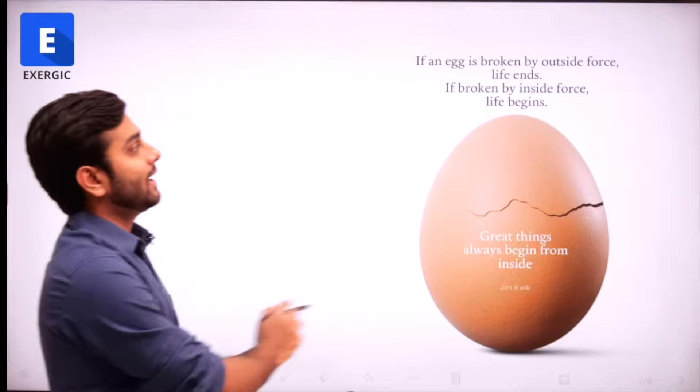Hello dear students, let us start this course by a very beautiful and very meaningful quote which is written here. If an egg is broken by the outside force, the life ends. But if it is broken by the inside force, the life begins. Great things always begin from inside.

What does it mean? It means that any egg, if it breaks from the outside, what happens? The life inside of that egg, it dies, right? It's the end of a life. But if it is breaking from the inside, means whatever living being is within that egg, that is opening up the shell, that is breaking the egg. It is the beginning of a life, right? So great things always begin from the inside.

Always look for inner inspirations and not external motivations. Always look for discipline which comes from within, right? This is something that you must realize, and it's a very important learning for you, not only as a GATE aspirant or any exams aspirant, but throughout in your life.

Now, why are we discussing this here in strength of materials? Let us focus on the first part of this. If an egg is broken by the outside force, the life ends, right? Any outside force, any outside load which is unwanted, in most of the times on any given body, on any component, has a negative effect, right? It tries to break it, crack it, bend it, distort it, deform it, right?

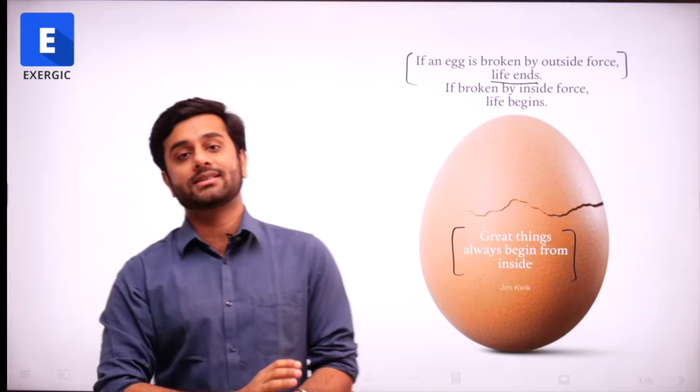Coming to the components that we design, that humans design, and especially we design them to be in use for long and long years. We want them to be of such a quality that they don't get bent, distort, deform due to any external load, any external force that is being applied to them, right? That is what we are going to study in strength of materials.

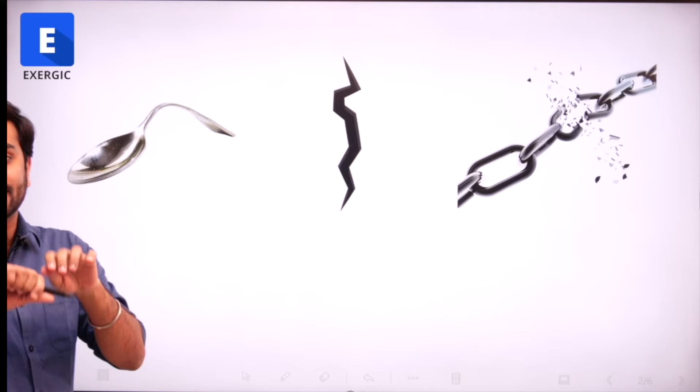There are a variety of things that can go wrong with any component that we have. Any component under use, under the action of external force, external load, either it can get bent, right? I have shown you a bent spoon, a very small example I am giving you right now. Or there can be cracks in that particular component, particular material, which can propagate, which can increase and finally break that particular component, right or not?

As an engineer, it's your responsibility, it is our responsibility to ensure a design using those materials, those designs, those components that do not bend, crack or fracture or break under the action of external loads, external forces, right? And that is what strength of materials is going to do. It's a very important subject and very interesting subject, has a variety of practical applications.

Whatever component we have, does not matter whether in mechanical engineering or electrical engineering or electronics or computer science engineering, whatever component you have, it is very much necessary to ensure that it does not break, right? Physically it does not break, bend, distort, right? Otherwise it will be of no use. Whether it's any electronics component, as I told you, or any mechanical component, right?

Right from a very small needle, right? Or a very small iron nail, to very large ships and buildings and bridges. Everything that we design, from that small size to those large dimensions, large sizes, everything we want to be in the right shape, right size, without any distortion, bending and any kind of fracture and breakage, right?

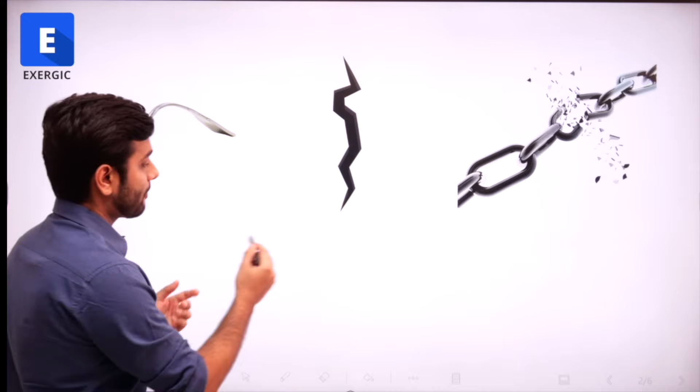One small thread, a very thin thread, and another thread we have which is thicker, okay? And what we are going to do now is apply a force on these threads, right? We are going to try to extend it. If one of them breaks, tell me which one is it going to be? If I am applying the same force on two threads, one is thinner, the other is thicker, of the same material, and one of them is going to break, tell me which one will break first?

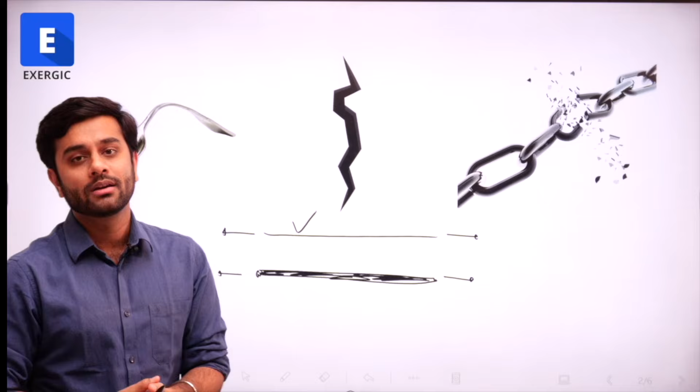This is going to break first, right? Very clear. It's the thin one. If I start asking you the concepts, why? You might not be able to conceptually answer it correctly at this point of time. But intuitively you can feel that this is the one which will break first. Similarly, I will give you one more example at this point of time.

Now suppose I have this scale, this ruler, right? If I try to bend it like this, and if I try to bend it like this, tell me which one of them will bend easier? Even without having a scale, you can answer based upon intuitive feelings. This is a scale. If I try to bend it like this, or if I try to bend it like this, what do you think? Which one of them will be easier to bend? Very easily you can answer this if you intuitively feel what is going on, right?

Very easy to bend it like this. But if you try to bend it like this, it's not easy. Even without having a scale in your hand, if you just close your eyes and imagine a scale or any such flat surface, you will realize that it's easy to bend it like this, but it's not easy to bend it like this, right? This is an experiment, right? The conclusion of this experiment you can very easily predict without even knowing the concept.

If I asked you the same thing for a different system, for some electrical system, and I asked you the conclusion of that experiment, you might not be able to answer it without knowing the concept, right? At this point of time, we have not discussed why it is able to easily bend like this, but it's not able to bend like this. Material is same, right? The applied moment, applied load is also same. But how is it happening? What concepts are governing this? We have not discussed yet. But still we are in a state to predict the conclusion of this experiment.

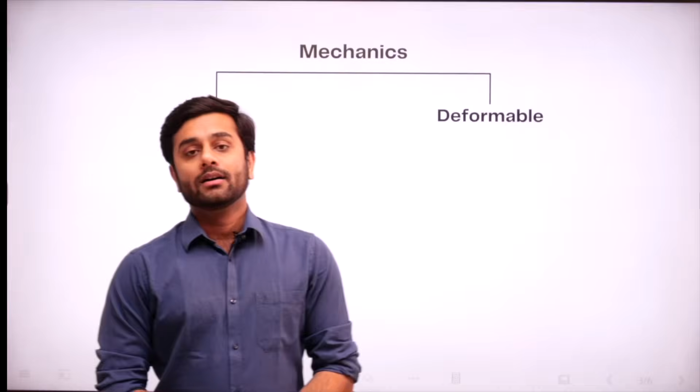Now, mechanics is a general name, a general branch of study which is divided across many classifications, right? The very first and basic classification of mechanics is between rigid and deformable bodies. Whether the body that we are analyzing is a rigid body or a deformable body, on the basis of that, the first classification is done.

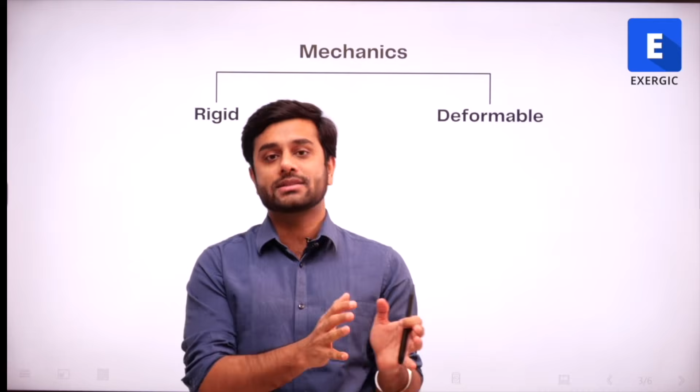And then it branches into engineering mechanics, something that we have covered already, right? Strength of materials or mechanics of materials is also a mechanics, right? Fluid mechanics, and even theory of machines and vibrations to a great extent. So that classification is what we are going to study now.

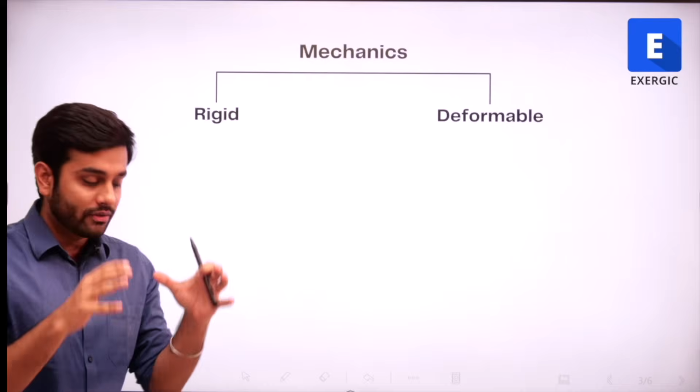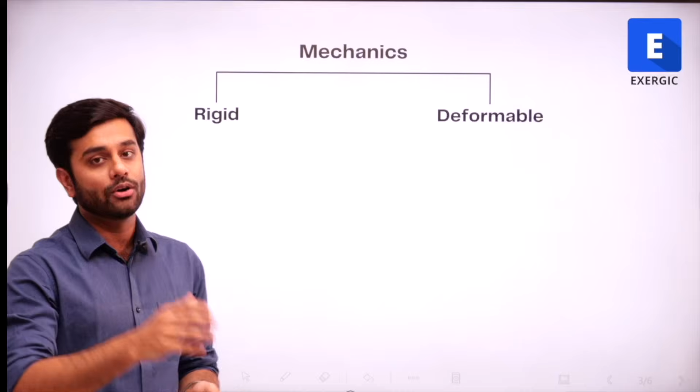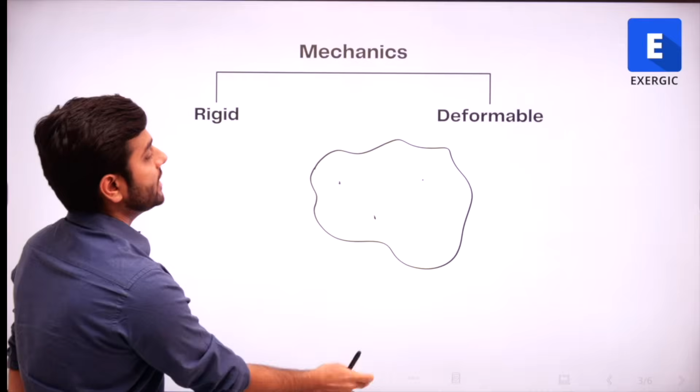So the first classification, as I told you, is based upon whether the body that we are considering is a rigid body or a deformable body. Let us first understand what exactly is meant by a rigid body or a deformable body. Suppose you have a general body shape I have shown here, right? It's a general solid body. On this body, any 2 points you take, it can be this one, or this one, or this one, any 2 points. So I have taken point A and point B.

Now this body is acted upon by different external forces or loads, okay? Under the action of that, in any general case, it is very much possible that the shape of this body is going to change, or the size of this body is going to change, right? I'm sure you know the difference between shape and size. It's very important. It's a basic English term, but you must know and realize the difference between shape and size.

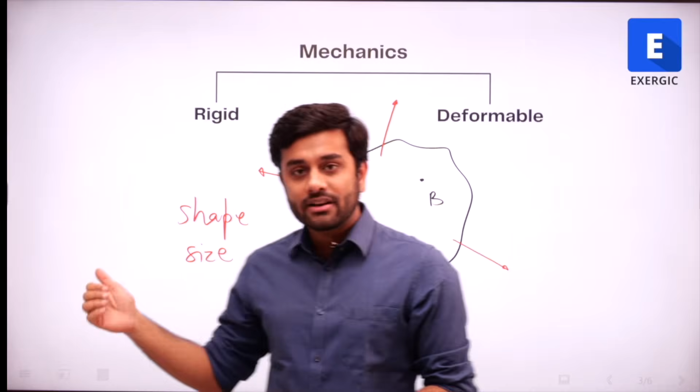Shape is something which tells you how the body looks from the external point of view. What I mean to say is, if the body looks cuboidal in shape, spherical in shape, triangular in shape, right? These all are the shapes of the body. It defines the orientation or the exterior look of the body. That is called a shape. Size refers to how large or how big the body is, right?

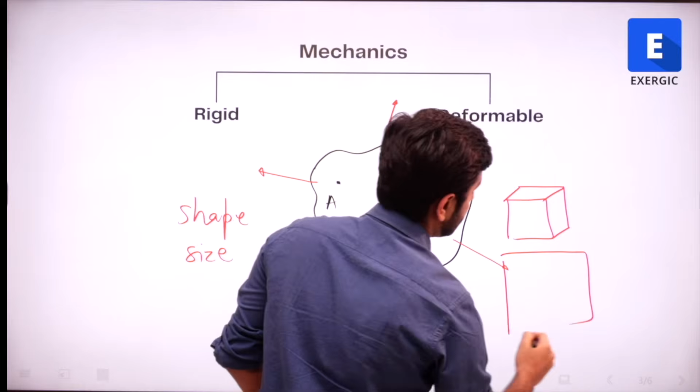So if I tell you through an example, this is a cube which is smaller in size, but the shape is a cube. If I draw another cube, this is also a cube. Both of them are having the same shape, but their sizes are not same. It is smaller in size, it is larger in size. It's a basic difference. I know strength of materials is not to tell these basic things, but I assume some of you might be having confusion about them. So I cleared it here because it will be discussed further in strength of materials.

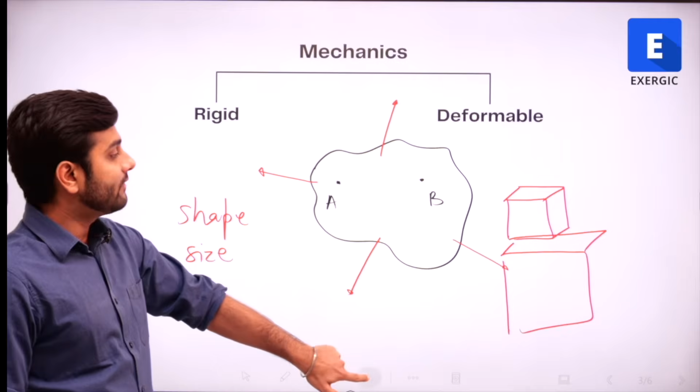So coming to the point, we are having a body here, as you can see, and this body is acted upon by different external loads or forces. Now it is very much possible that under the action of these forces acting on the body, the distance between point A and B will change. It can increase, it can decrease, right? A lot of things can happen.

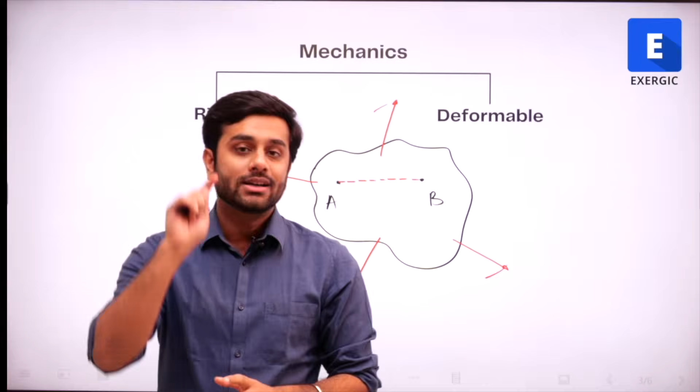A hypothetical body in which the distance between the points A and B does not change, no matter how many forces you apply, how heavy or how large loads you apply, such a body is called a rigid body. In a rigid body, the distance between any two randomly picked points will not change, irrespective of the external loads or forces applied on that body. Obviously, this is a hypothetical body.

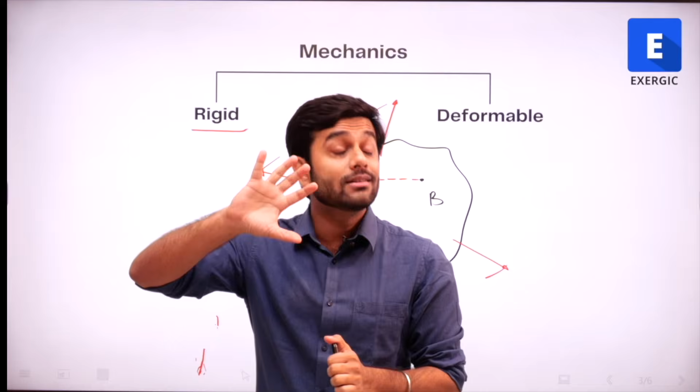No body in the world is a perfectly rigid body, because we know that the larger the force you apply, the result will be visible, right? It may not be visible to the naked eye, but the distance between the 2 points will start to change, will start to increase or decrease, right? But a rigid body is a hypothetical body, which means it is not real. No body in the entire world is actually rigid. All the other bodies that are available are deformable bodies.

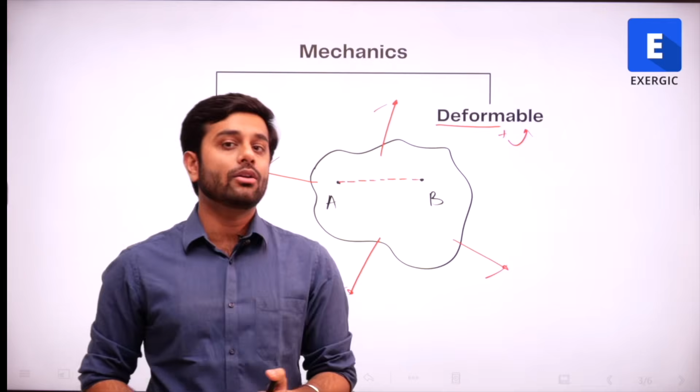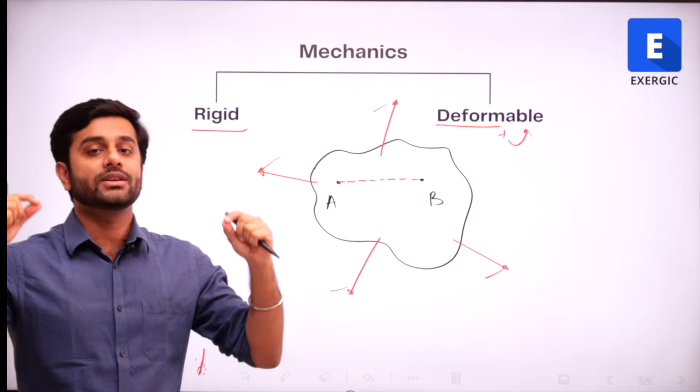What is meant by deformable body? The name itself tells you. Deform plus able, a body which is able to get deformed, which can change its shape, its size, right? Such a body is called a deformable body. In more technical or conceptual words, any two random points you pick on the body, under the action of applied loads, the distance between those 2 points will change. Such a body is called a deformable body. All real bodies are deformable.

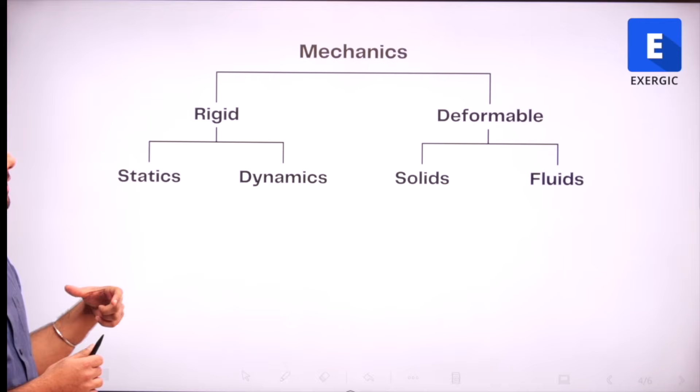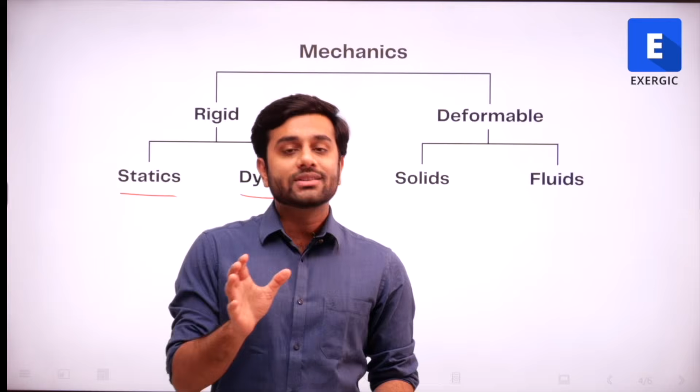So after understanding the first classification on the basis of whether the body is rigid or deformable, let us see further classification. As you can see, rigid bodies are further divided into two different branches of study. First is statics, other is dynamics. Let me brief you about this, although you already have an idea because you have covered engineering mechanics. In engineering mechanics, we don't consider the deformation of the body. We don't consider that under the action of applied force, the shape or the size of the body will change.

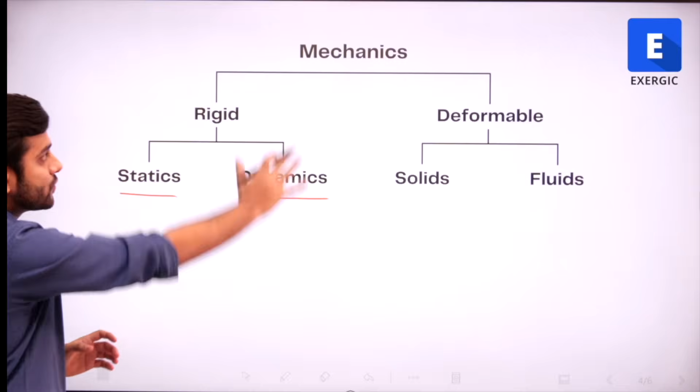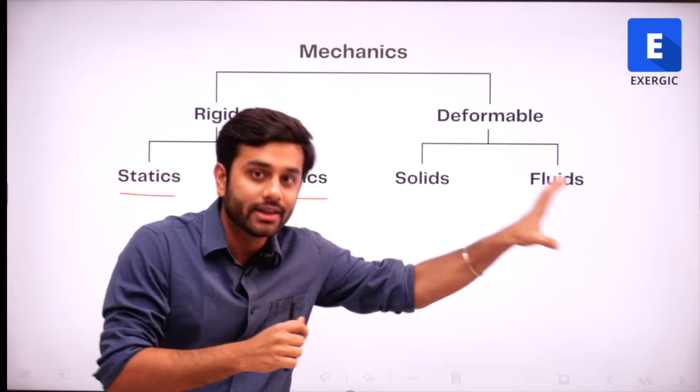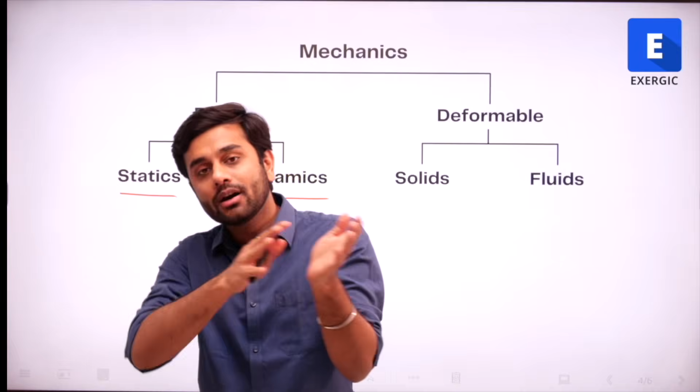Rather, we study the effect of the force by considering the motion of the body, whether the body is at rest or has started to move. That is the criteria on which we discuss engineering mechanics. In engineering mechanics, we never consider the deformation, twisting, bending, or distortion of the body. That branch of study is called rigid body mechanics. Even if the body is deformable and those deformations might be happening, that is not the point of discussion in engineering mechanics. We are only concerned about the motion part of the force.

This is further divided into statics and dynamics, which we have already covered in engineering mechanics. Then dynamics is further divided into kinematics and kinetics, which we have also already covered.

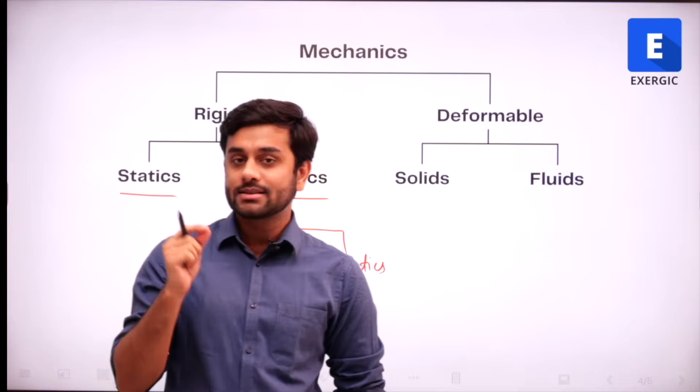At this point, I would also like to mention another subject here, which is theory of machines. This is another design subject which we are going to cover. In theory of machines also, the parts are considered to be rigid, and the deformation of the parts is not discussed. So theory of machines also comes under rigid body mechanics.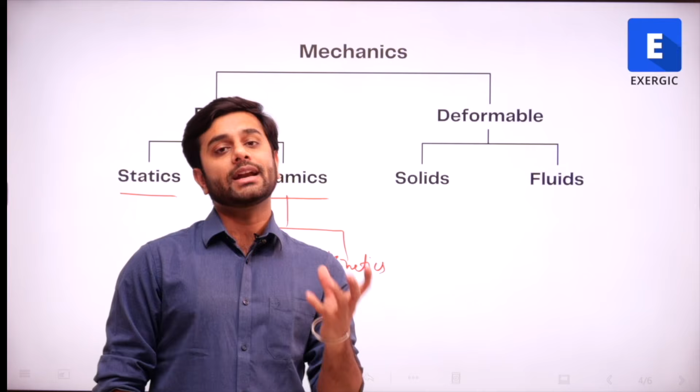You will find in some sources that theory of machines is said to be a part of rigid body dynamics, but that is not totally correct, because in theory of machines statics conditions also exist. When we cover theory of machines, you will realize that gear trains and some other cases involve static rigid body discussion. That is why theory of machines comes under rigid body mechanics, where both statics and dynamics are discussed. As you can see, mechanics has been divided into different branches which we deal with as different subjects, so you can see how interconnected they are.

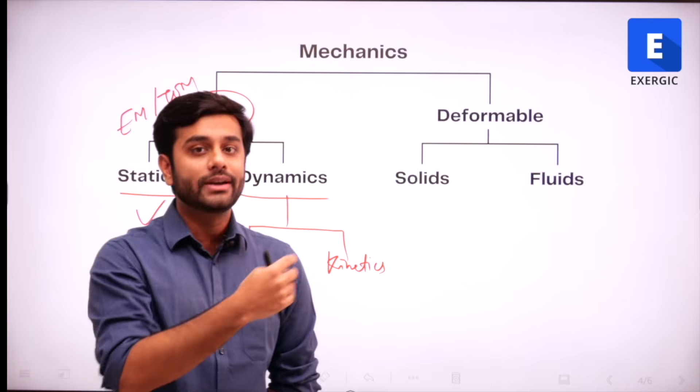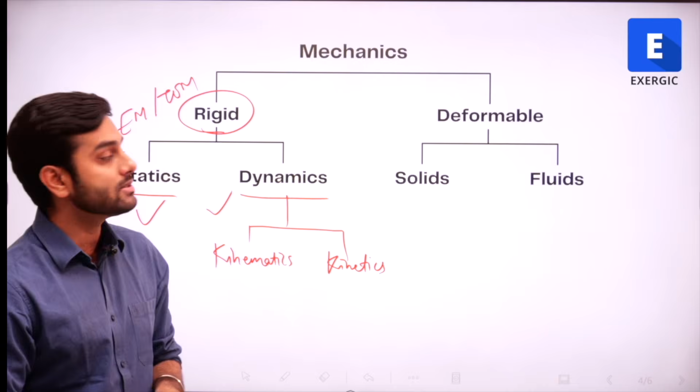Engineering mechanics and theory of machines will be rigid body mechanics. Coming to the deformable part now, you can clearly see two different classifications: one is solids, the other is fluids. When we have a solid body which is deforming, you can further classify that into two branches: one is statics, when the body is not in bulk motion and is at its own place, and the other is dynamics, when the body may dislocate or start moving.

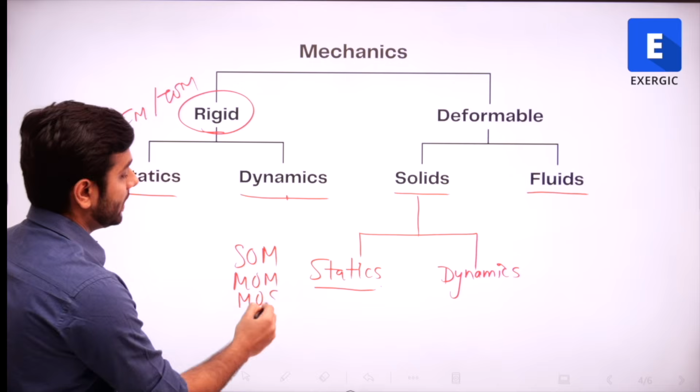This particular study comes under strength of materials. There are different names given to it: strength of materials, mechanics of materials, mechanics of solids. I'm sure you have heard of these names already. Strength of materials is the course name we are having right now; mechanics of materials is MOM, mechanics of solids is MOS. These are different names for the same subject. As you can see, it's a type of mechanics, but a deformable mechanics, in which we will study solids under statics. So this is the exact position of strength of materials in this whole tree.

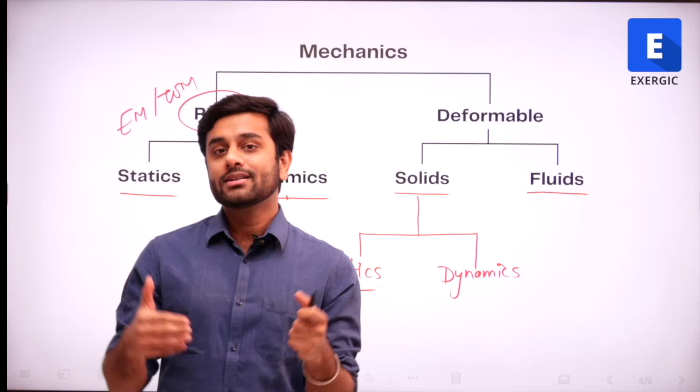At the same time, the dynamics part of deformable solids we study in vibrations. Vibrations in our course is a part of theory of machines only. As such, it is mentioned in the GATE syllabus separately—again a very important discussion, but in our course it is taught within theory of machines itself.

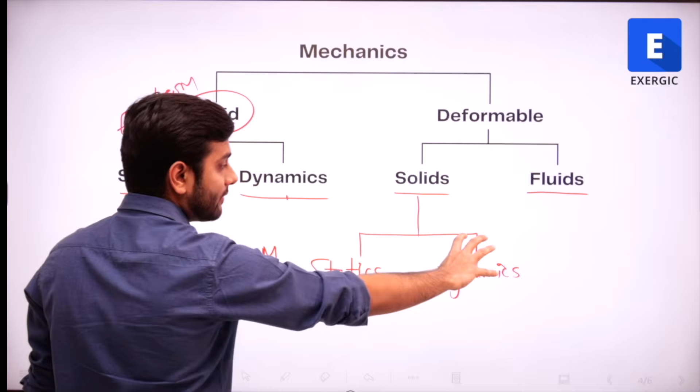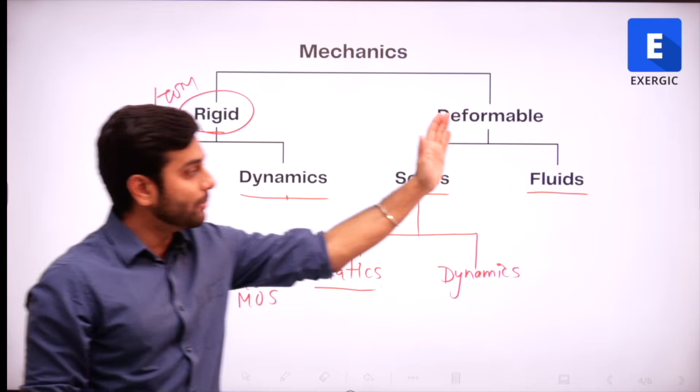Coming to fluids, they again are divided as the same, statics and dynamics. As you can see, this is also divided into statics and dynamics, and dynamics again will be divided into kinematics and kinetics. So that complete discussion of fluids is again a subject which we call fluid mechanics.

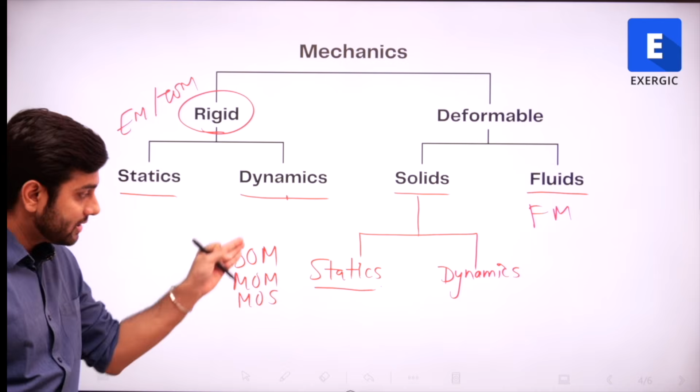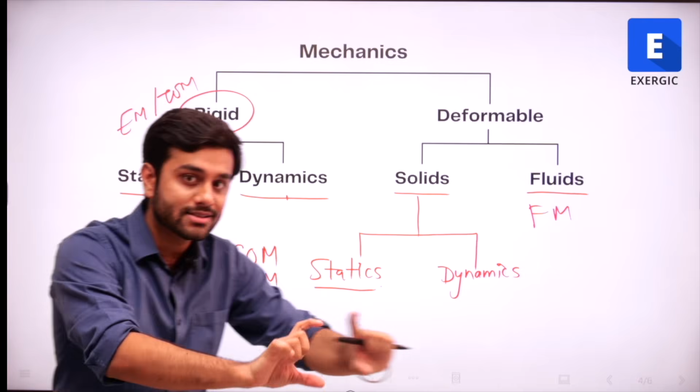As you can see, from a single branch of mechanics, how many different subjects are coming out. If I point it out exactly from the GATE syllabus, mechanics is a subject, theory of machines is a subject, strength of materials is a subject that we are going to discuss and have started, fluid mechanics is a subject, and vibrations, which we are going to study, is also a separate subject in the GATE syllabus, although I will teach that within theory of machines.

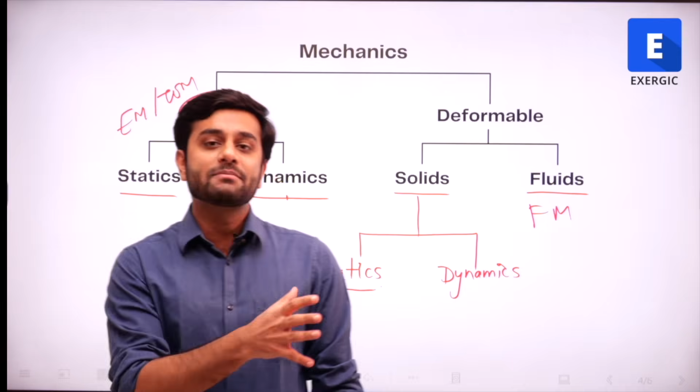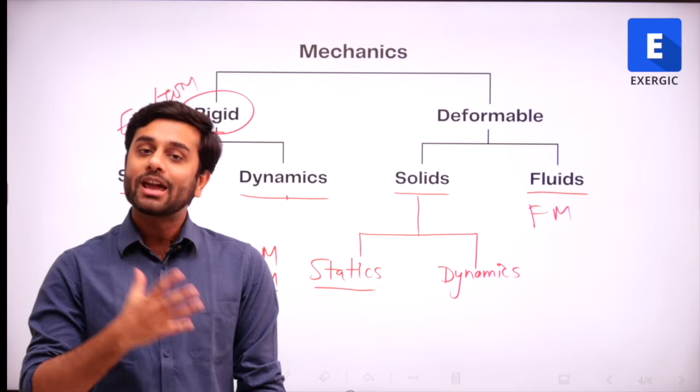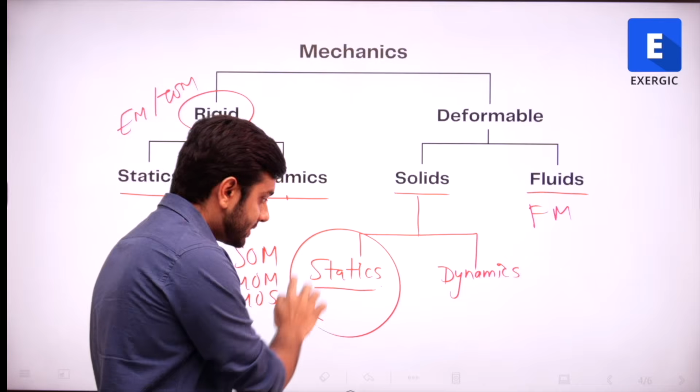So total 5 subjects are emerging out of mechanics. There are many core similarities between all of them because they originate from mechanics, but there are differences between them based upon what type of body it is and whether the body is in statics or dynamics. So this is the complete overview. We are going to focus on this part here, which is deformable body mechanics.